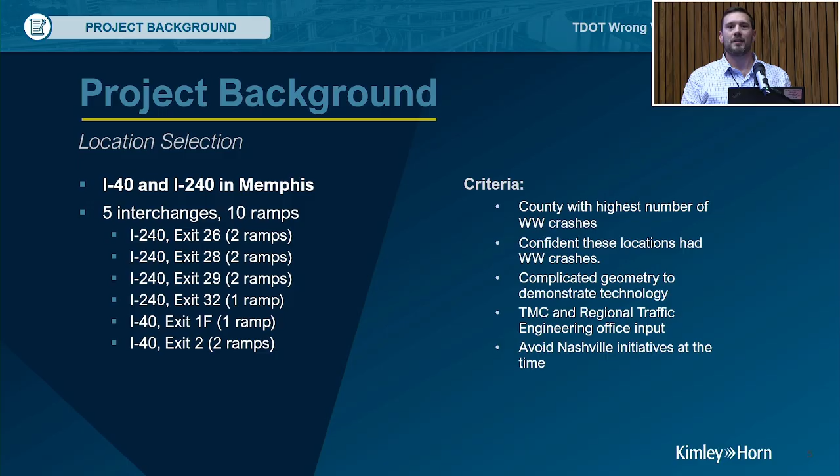They also have a lot of complicated geometry, Doug will get into that in a little bit. So if the system can work here, it can pretty much work anywhere in the state. There's also some feedback from the TMC and the regional traffic engineering offices. Nashville was second on the list, but we wanted to avoid that area because there were other initiatives going on that could impact our analysis of this system. All right, with that I'll go over to Doug to talk about project design.

I'm going to start off by talking through some of these locations Cam mentioned. We had 5 different interchanges with 10 ramps. The one on the top left is Chelsea Avenue. If you're familiar with Memphis, it's the north-south portion of I-40, I-240 that runs in the downtown area just east of the river. So I-40 is on the north, and then I-40 actually cuts west in the middle of our segment over into Arkansas. Then 240, the south portion, actually turns into I-55 going south into Mississippi.

So this is a segment that actually leads into 2 different states, depending on where those vehicles come from or go to. On the north you've got Chelsea Avenue, the next one is Jackson Avenue, then you've got Lamar Avenue, South Parkway, and then one on the south is the Norris Road exit right before 240 hits 55 as it's coming into the Memphis area.

This shows some of the existing ITS infrastructure along the corridor. One of the other reasons why this was a good corridor to choose is there's a good baseline of infrastructure along the corridor, like CCTV cameras and DMS signs, so we could leverage that with our technology to bring in other components that were already out there and reduce the cost of building a fully functional system.

There was one gap. We went out and checked gaps of coverage. One of the goals of one of these systems is to be able to visually confirm that you have a wrong way driver. None of these systems are really 100% accurate, you will have some false calls, whether that's an animal, a maintenance truck backing down the interstate ramp, or a police vehicle. So it's important for our TMC operators to be able to lay eyes on the situation and confirm that it is a wrong way driving situation.

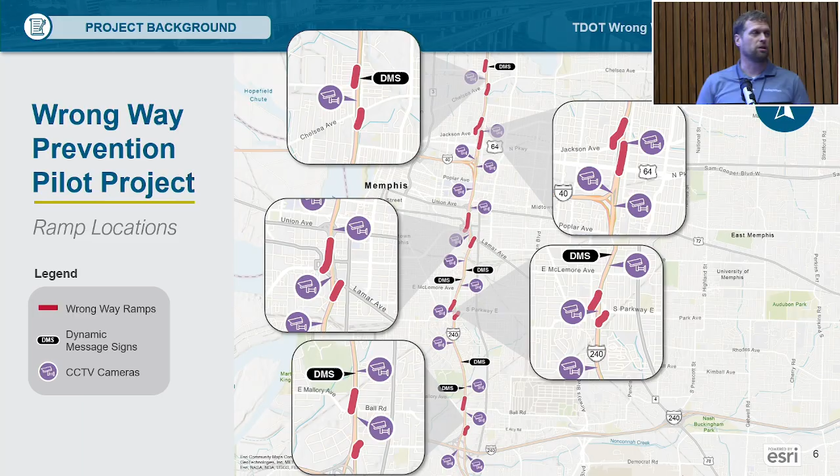So we had one location up at Chelsea Avenue where we didn't have coverage of that northernmost ramp, and so we're installing one more CCTV camera as part of this project as well.

These systems have about an 87% rate of self-correction, based on research done out in Arizona with some of their systems. So you're avoiding a potential head-on collision on a main line that typically results in a fatality. Hopefully it's less than that, but a lot of times these end in fatalities, unfortunately.

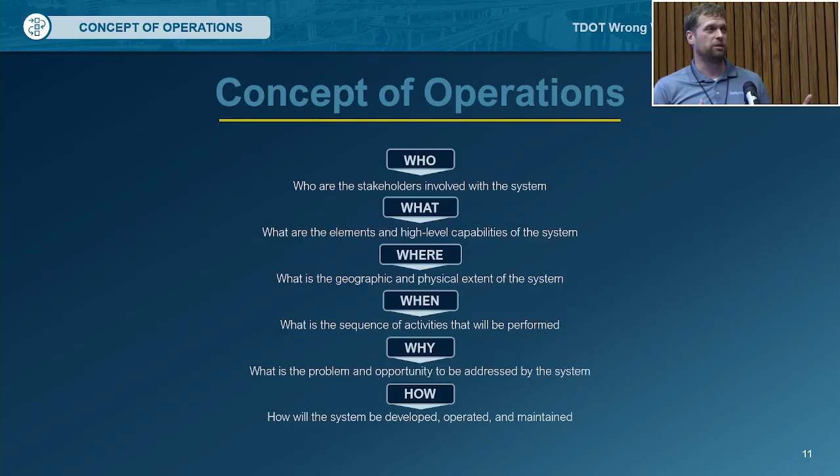If it's a confirmed wrong way driving event, the TMC operator can hit a button and all these automated response plans would happen. But there are some things you want to happen immediately, like the LED flashing signs. The moment a vehicle is detected, you want those coming on because you want to make the driver aware that he's made a mistake. So we went through that sequence of events with them and started developing how we wanted everything to operate.

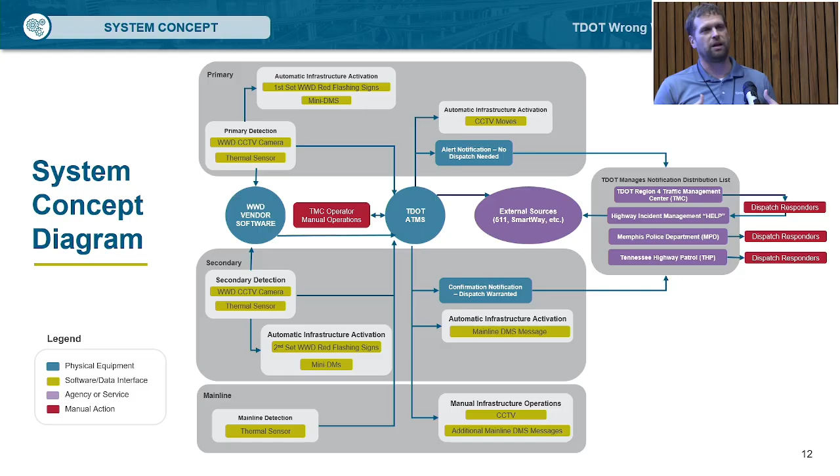We also have some automatic alerts that go out, whether that's to the TMC operators or other people within TDOT, or even at some point Memphis Police or THP, Tennessee Highway Patrol, get alerts as well. The next box, the second gray box, is our secondary zone, with some things identified as automatic and manual type responses, and then the bottom one is the main line. We do have detectors on the ramps, but we also have detectors on the main line, and I'll talk about why we have those in just a minute.

So there's the message that goes out. You want to make the wrong way driver aware with the flashing LED signs, but then what do you put on the sign to tell a right way driver that something's going on ahead? Do you tell them to move left? Do you tell them to move right? Do you tell them to get off the interstate? Ultimately what research has shown is you don't tell them to do anything, because you don't know where that wrong way driver is going to be. Most of the time they move to the right-hand side of the road, which is the left-hand side of the road for the right way driver. So we developed messaging for what those right way drivers are going to see on the DMS sign.

One thing we added is the LED backlit do not enter signs. That's a preventative measure that'll go at the top of the ramp. If you're familiar with TAPCO, they have a Legend Viz sign, which is just a backlit LED do not enter sign. We're adding those to all the tops of the ramps as well, to hopefully deter people from even making the wrong movement onto the ramp before they even reach our system.

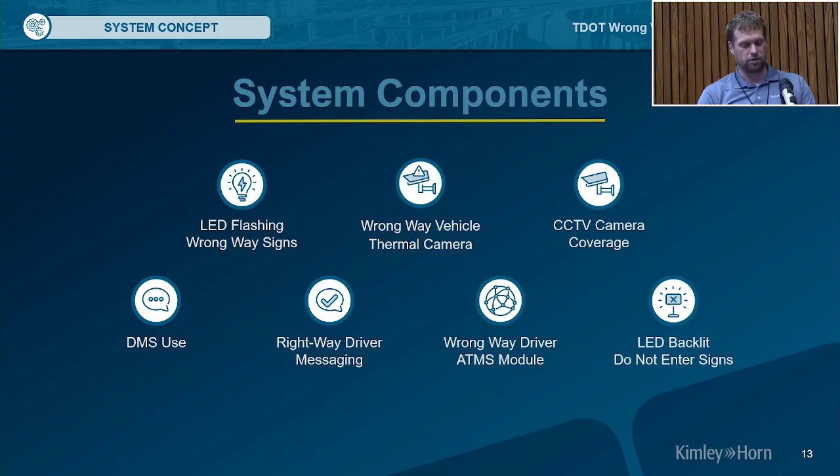Our secondary line is the confirmation zone. We're using it to track and understand what vehicles are not self-correcting. So if they trigger the first one and don't trigger the second one, if the TMC operator didn't get there in time and they self-corrected, they can know they self-corrected because they didn't trigger that second zone. But if they do trigger the second zone, then we know they've moved towards the main line, and now we know we're probably in a wrong way driving situation and we need to respond.

The main line is to track them. We've got 5 different interchanges like I mentioned. So if they get on at the southernmost interchange, we can track them with the main line as they trigger them going down the corridor. However, like I mentioned earlier, we do have different interstates that bisect our corridor coming from Arkansas, I-40. We also have I-55 that's coming up from the south.

And so, like Cam mentioned, it's hard to understand wrong way driving if you don't have detectors or the ability to track these vehicles. You know where the crash happened, but you don't know where they got on going the wrong way. So for us having a pilot corridor, we needed to understand, if there was a crash on our corridor, a head-on crash, did our detector miss it on an upstream ramp, or did they come from off of our pilot corridor? So we've got these positions to be able to track. If they came on our corridor from the south, or came in from Mississippi, or from the west, from Arkansas, we would know that based on those mainline detectors tracking them.

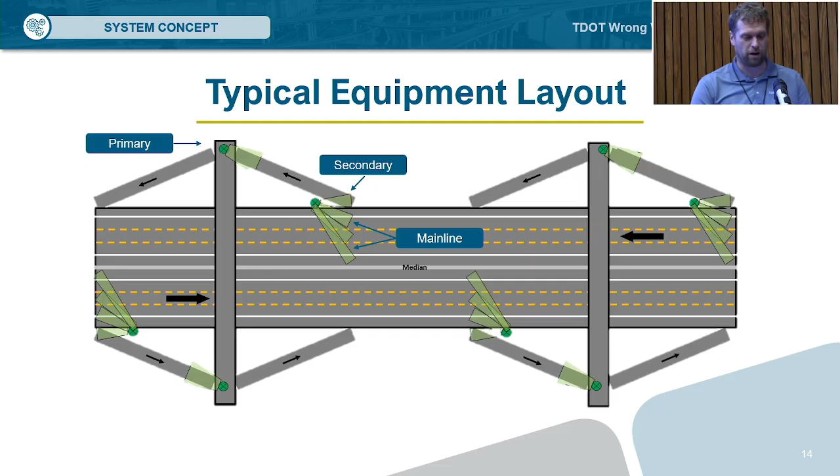We also developed operational scenarios for what's going to happen in each of these cases. There's a lot of decisions that can be made depending on what the driver does. The first one is what happens if the wrong way driver self-corrects at that initial zone. They trigger, they see the lights, they turn around like we saw in that first video. Does the TMC operator care? Do we deploy Memphis Police to go pick them up and see what's going on? Most of the time, these happen at night, with drivers under the influence, or with elderly drivers who maybe didn't take their medication. That's based on a lot of research. You see a lot of those things. So Memphis Police said we may want to stop them anyway, even if they self-correct. They wanted a notification that, hey, we did have a wrong way driver, even though they did self-correct. I don't know that they can get out there quick enough to track them down, but they wanted that information.

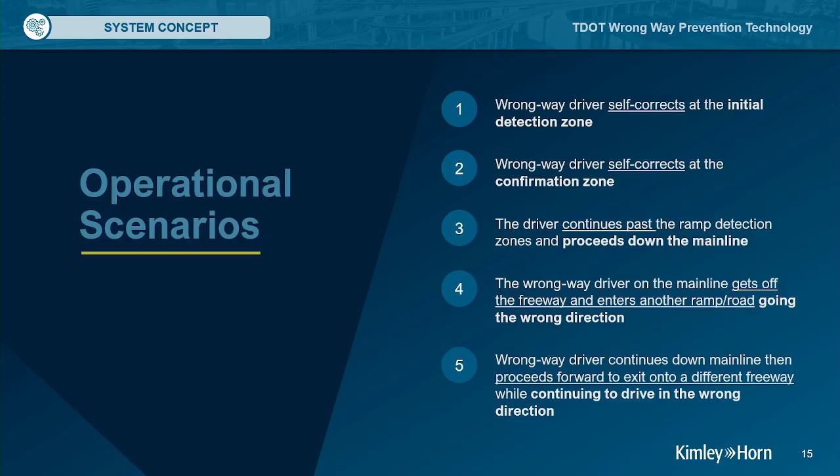Secondly, what happens if they self-correct at the confirmation zone, like you saw in the second video? What if they turn and go in the right direction on the main line? What do we do? We worked through all these scenarios, workshopped them with the whole stakeholder group, and figured out what each group expected to happen and how we could leverage technology to make that easier. All the way down, if we're now in a wrong way driving situation in scenario 3 where they've proceeded and they're on the main line, scenario 4 if they get off on one of those arterial roads, now they're going the wrong way on an arterial road, or what if they leave our corridor and go to another state, or continue on another main interstate. There were a lot of different scenarios we had to flesh out and figure out exactly what was going to happen within the system.

So I'm going to take a few minutes to talk through the geometric challenges that Cam mentioned earlier. The image on the bottom left is the northernmost interstate ramp, Chelsea Avenue. It's a straight, short ramp, so pardon my pun, but it was pretty straightforward for us. Single pole - I'll show you the plan. It was really easy to get all of our detectors on a single pole and figure that ramp out.

The one on the right is South Parkway, a full cloverleaf on the top right, and the bottom right is zoomed in on that top right portion. This is a unique ramp - you have a ramp from the interstate coming in that's actually tying into a one-way local street. You can see it coming in on the right-hand side, and there are driveways to a gas station on this one-way section. So this is one of those confusing geometric situations where you probably have people coming out of that driveway, maybe turning onto that ramp, and now they're going in the wrong direction on the interstate.

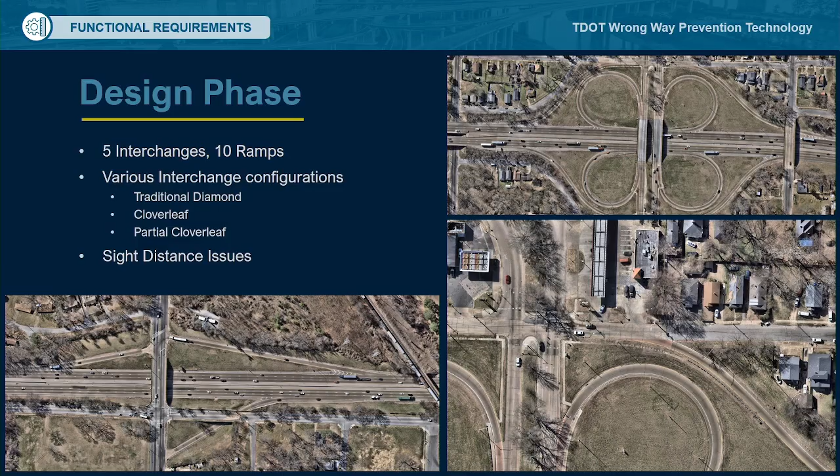These can happen really easily, really quickly when you have confusing geometry like this. But one of the questions was, where do you put your primary detection? We've got it placed after the gore, so we know if they enter the ramp going the wrong direction, because we went out there and watched it. I guarantee you people come out of that driveway and go into that neighborhood the wrong direction all the time. So we don't want this thing triggering every time somebody does that - we had to make sure we put it in a place where we really understood where our wrong-way driving scenario was occurring.

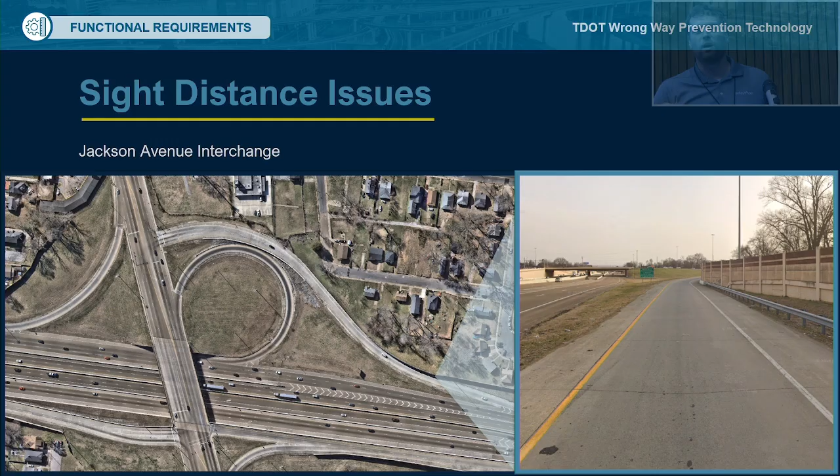This is another one, Jackson Avenue, where we had some sight distance issues. You can see the horizontal curve in the ramp - it actually has a vertical curve as well as you're going up, but that noise wall on the right kind of provided a blind sight line for our right-way drivers. So if there's a vehicle coming the wrong way down that ramp from the arterial, the right-way driver would never know it - they wouldn't see it around that noise wall.

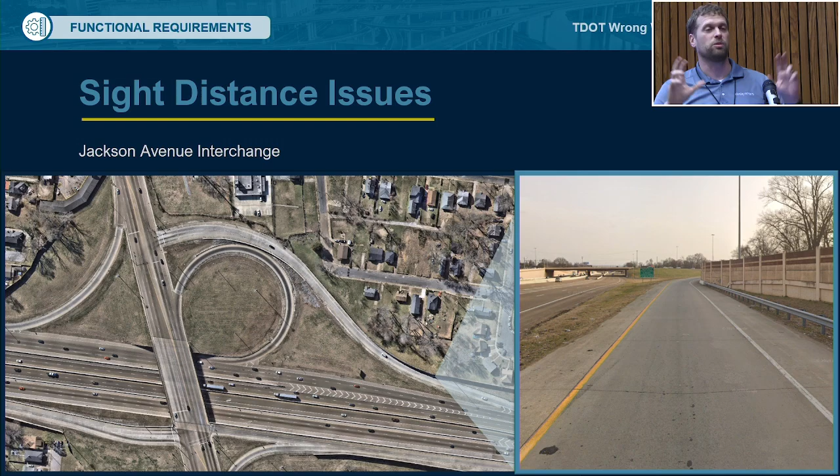So this is a situation where we're implementing what's called an over-the-shoulder DMS sign. It's about a 5x6 sign over that shoulder, kind of right behind that guardrail, and it'll have a message to the right-way driver so that when somebody triggers that primary detection point and the LED flashing lights come on, this sign comes on, giving the right-way driver a message - caution ahead on ramp, or some general message so they know to slow down and be careful.

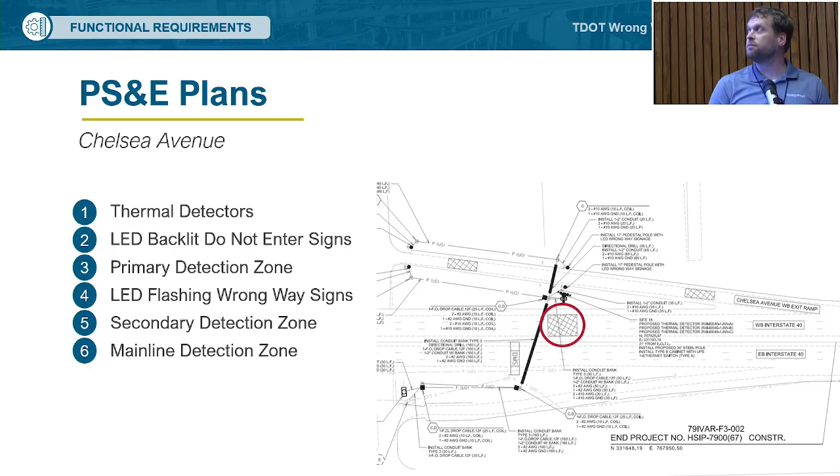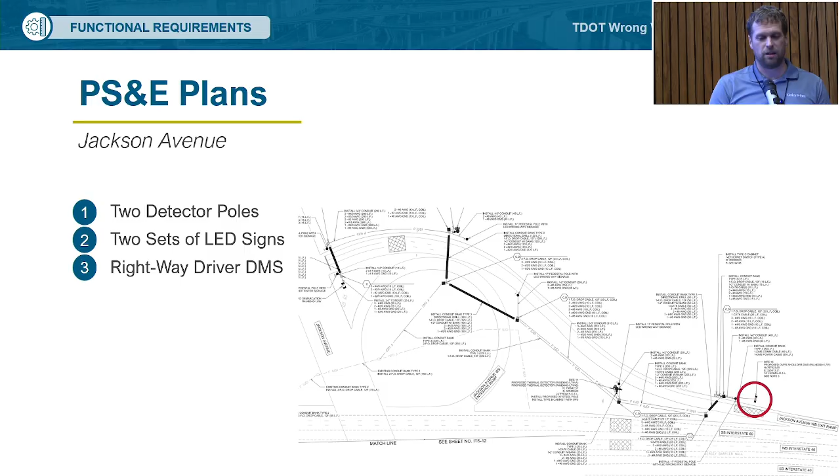This is the Jackson Avenue ramp that I showed you, which had that sight line issue. In this case, we had to separate our detectors into 2 pole locations to get our primary and secondary zones. We do have 2 sets of LED flashing signs that'll both come on with that primary detection, and then we have our over-the-shoulder right-way DMS sign, like I mentioned earlier. So that gives you an idea of the components and layout of what you'll see in this system.

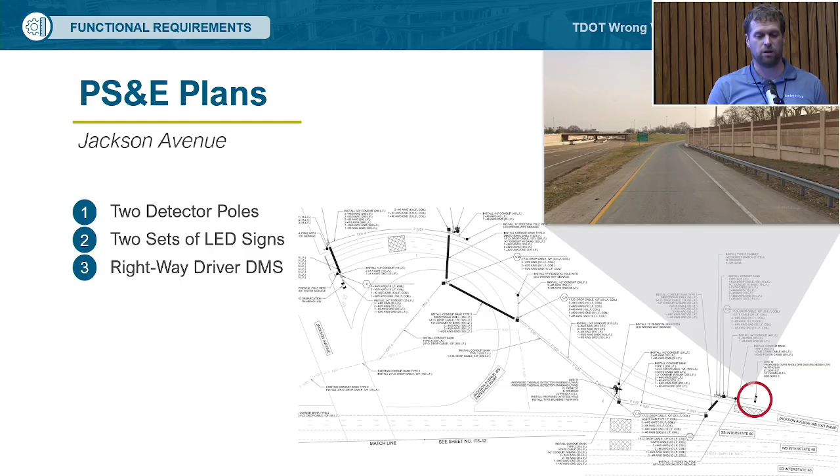Drink this weird canned water for a second.

So, project schedule. Right now we are developing the technical requirements for the software, in partnership with the Southwest Research Institute, or SWRI, the ones that developed the SmartWay Central software that our ITS system uses. The letting date was May 9th of 2025, and it was let for $2.9 million, so roughly about $3 million cost.

Shelby Electric was selected as the contractor for the project, with TAPCO as the wrong-way equipment vendor. This is an interesting relationship because they're doing a project of a very similar scale and scope right across into Arkansas, which I believe helped with the cost of this project. They were able to come in a little underbid from what we expected, which isn't too common these days.

In terms of construction, it started in September of 2025 with some preliminary activities. We're looking to actually test the system in fall of 2026, and hopefully have an operational system by the end of December 2026. So as we get into 2027 and beyond, I'm hoping to utilize some benefits from this system.

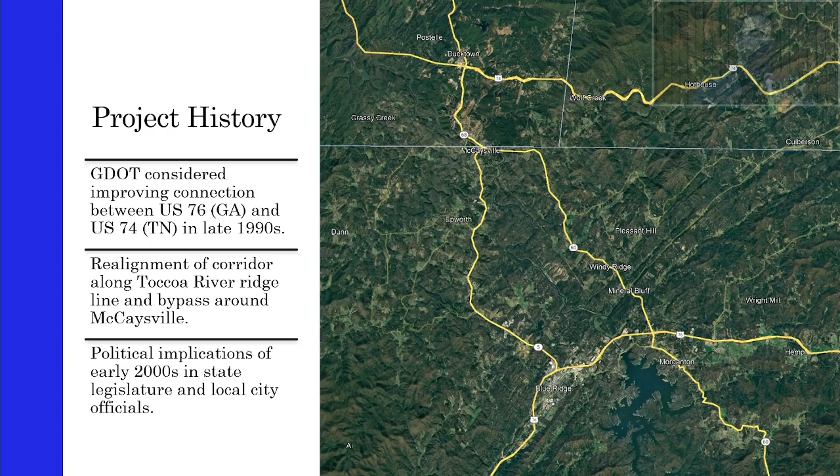This project was moving forward, but because of some political implications, which tends to happen, you had the state legislature as well as the local officials, especially within McCaysville, and through those coordinations it's become what it is today. Ethan's going to talk a little bit about that in his portion later, because what we're going to focus on today is this project from our different perspectives - me as Jacobs from the consultant, and then from the 2 different DOTs that have had to coordinate through this project.

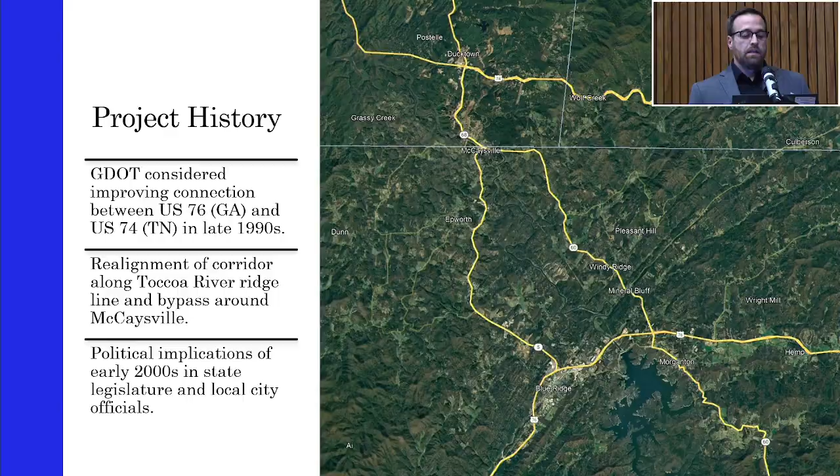Zooming in a little bit more on our project history, you have to go back to 2015. That's when the combined project, which you see the 3 phases up there, began with the first concept report in 2016. Through that coordination, through those changes, we had another concept report in 2018. Then 3 years later, GDOT decided to have a revised concept report where we split the project from one large widening down to the 3 phases, looking at cost and schedule to see what they could move forward and build while the other 2 are coming behind it.

So in this case we have the 3 pieces. You'll see in blue here the SR5 North Georgia Sidewalks project. This goes along SR5 North. It's fully within Georgia, all the way through downtown McCaysville. It's a widening and operation improvement project. You can see at the very end where McCaysville and Copperhill meet at the Tennessee state line, it's a T intersection - it's really difficult for trucks to get through that area. It's very tight, with a lot of downtown structures and downtown parking.

So that's where the other piece comes in, the bypass. It's a new location road that's 2 phases. You'll see in green there, we call it the SR5 connector to Georgia bypass. That's fully on the Georgia side. It comes off a roundabout from the Georgia sidewalks and goes all the way to the state line. From there you have the 3rd phase, which we're going to start highlighting starting next slide. This one starts at the state line, called the SR68 connector, because on the Tennessee side you're connected into SR68 instead. This one comes down, bridges over the river, comes around the hill - you can see the loop there - and then ties into a roundabout at SR68.

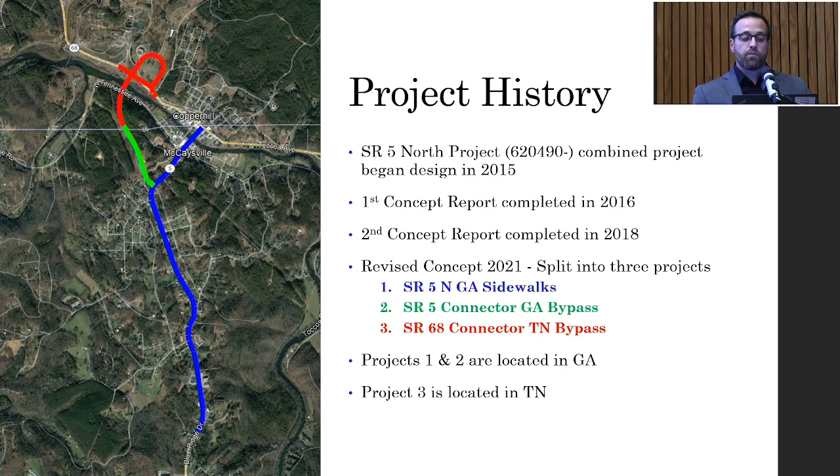As I already noted, the first 2 phases, the blue and green, those are fully within Georgia. The 3rd phase is in Tennessee.

Hold on, I think I skipped it. Yeah, there we go. So zooming in on the project.

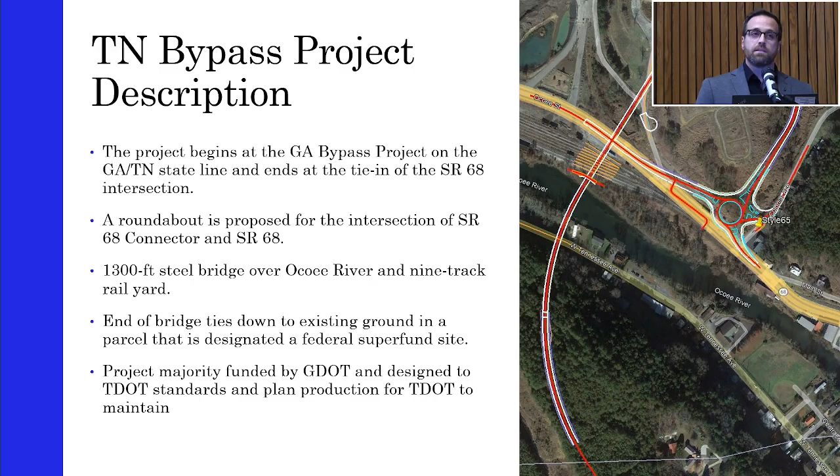So this is just the Tennessee portion. This is phase 3. This is under design currently, moving towards plan in hand plans next year. This project begins at the Georgia bypass at the state line, comes down, ties into SR68 at the roundabout, which you can see there. This project has a 1,300-foot steel bridge that'll go over 2 roadways, a fairly large river, a 9-track rail yard, as well as Baltic Ave that comes up to the administrative offices on that parcel. Another fun part of this one is the end of the bridge where it ties down over there and loops around that hill - that existing parcel is a federally designated Superfund site, so that also added some extra coordination into the project.

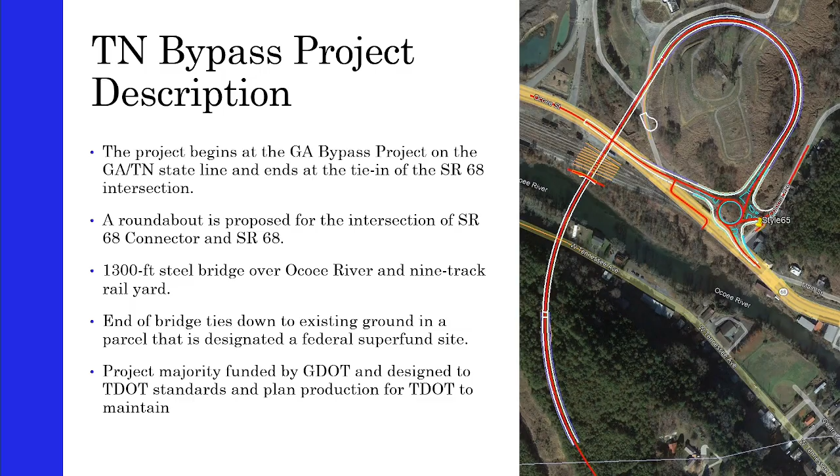Did want to note this part, we'll talk about it a little bit more later too - the project is majority funded by GDOT, but it's going to be designed to TDOT standards and plan production, as well as it will be for TDOT to maintain afterwards.

Some of the project challenges - if you haven't seen any already, or hopefully you've seen what we've already been dealing with - there's some other ones that we also had to work through and really coordinate between the states. On the environmental side of things, you have the permitting, you had to work with the GDOT process and figure out what that TDOT permitting was going to look like. What kind of challenges are we going to be sitting with? We have a Superfund site, so what are the challenges that come from that? What type of mitigation, or what do you have to haul away if you're going to impact any of that site? And railroad coordination - we're crossing a 9-track rail system.

It's not that busy of a line, but it's still owned by the railroad, and the existing roadway of SR68 falls within their property. So you already have easement, but we're going to need future easement as well for that.

And for what I was already talking about, you have two state processes that we're trying to merge together. GDOT's paying for this project, so we have to work through their procurement process, but we're trying to make sure we're setting the schedule and requirements that follow TDOT.

So we're trying to figure out and bridge those gaps. The main thing really comes down to trying to figure out what that schedule is going to look like. We can talk in similar words and be saying different things, or be saying different things but talking about the same thing. So we're trying to figure out where those connections are, and really figure out the cost and schedule of this project, and how we get to the end goal.

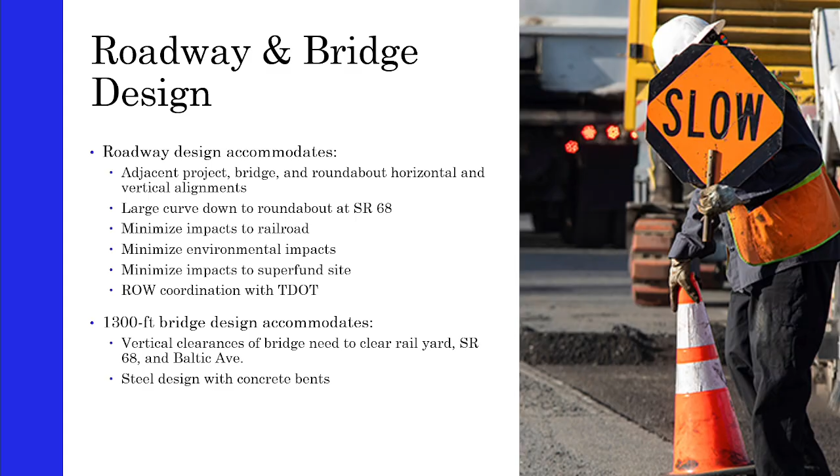We had to really coordinate with all those different disciplines within TDOT and GDOT to try to figure out what it's going to take to buy that right-of-way, and how long that process is going to take. Surprise—it takes a while.

For the bridge, like I said, you have a 1,300-foot-long bridge with all those vertical clearances. You have to get over the railroad, and you have to work around the river, which is a recreational river through there. So you have folks fishing, kayaking, swimming, tubing, all within this river that you have to work around. This bridge is a steel bridge with concrete bents too.

In the next part, we kind of talk about constructability. That played a big portion of our design.

With the TDOT process, this does require a constructability meeting, and this was back in 2023 after we did our right-of-way plans at that time. I hadn't been part of the TDOT process before, but it's a very robust process, and I think it works really well. I'll talk a little bit about that too.

For those in the GDOT hemisphere who don't know, they invited the TDOT folks, our GDOT folks, as well as the consultant working on it, Jacobs. Then they invite and share the plans as they currently are with four different contractors, and from there they set up meetings with those contractors, allowing them to look at it and then present their concerns and suggestions.

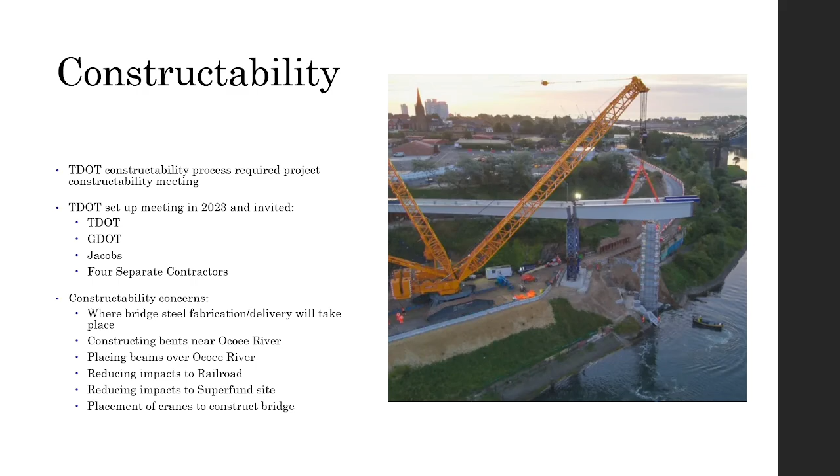Our bents are not in the river, but they're next to it. So do they need jetties to construct this? Where would they want to place their crane systems? The crane pads, how big are the cranes? Those are all questions that we were working through with them.

Some contractors needed larger cranes because they wanted to do with less, others wanted smaller cranes, and that all changed how much of that easement we were going to need. Their goal was always to reduce their impacts to those parcels from the construction side if they could. So through those conversations, we were able to help set that footprint for the project, and that way later on, the goal is that they have what they need. They don't need to go back to TDOT, or have to use more expensive methods to construct this, because we didn't give them enough space.

The next area that is not surprising is the environmental coordination. This has been a very big part, and we're still working through some of these items. The first item you have is that Superfund site, which is an old copper mine. So your first thought's probably, of course, that's a Superfund site, there's all those chemicals from the copper mine, but that's not really what was designated as a Superfund site. It was the acid-producing rock that was underground.

This rock is, once water infiltrates the ground or rain comes, if you expose that rock and rain hits it, there's a material in there that will dissolve slowly over time and decrease the pH of the water, making it acidic, which then kills the vegetation and the animals within the water. It goes into the streams, which are right next to the Ocoee River, and therefore flows into that.

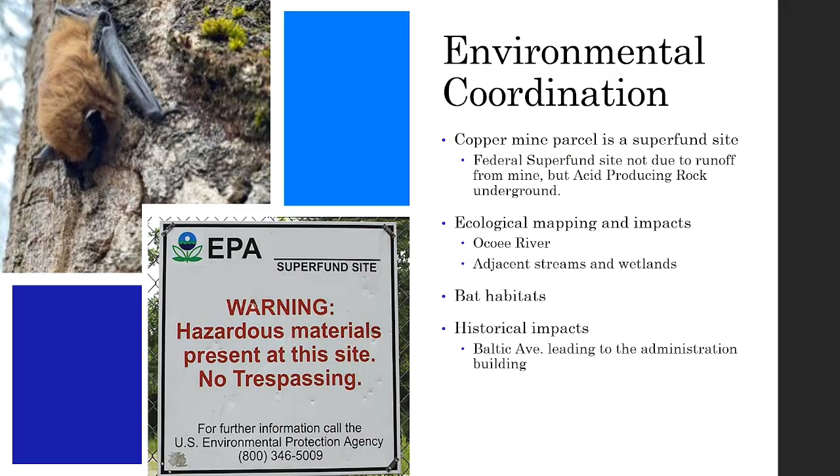The next discipline I'm going to talk about, and this is the last one for myself to talk about, is the geotechnical coordination. So we have the ESA phase 1 and 2. You have bridge foundations, culvert foundations, wall foundations, as well as that geotechnical report that tells you about the soils, about the acid producing material that's out there. All this required a lot of drilling and it took a very long time because it's out in a very rural area and it is hilly. So you can't have a lot of different drill rigs out there, if you can even find that many to get out there. So it's a huge undertaking that our geotech sub-consultant had to get done.

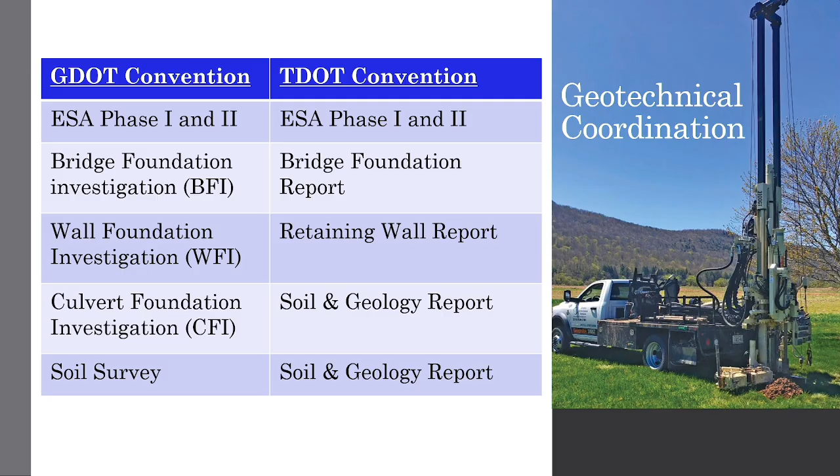And you run into these communication barriers sometimes where, as engineers, we love our acronyms, and your acronym doesn't necessarily line up with the other state. You're talking about the same report, but for example, you have GDOT's Bridge Foundation Investigation. Okay, that's pretty easy to figure out, but if I'm just saying BFI over and over, everyone's going to look at me like I'm crazy. So you have to figure out that naming convention and work through these different ones.

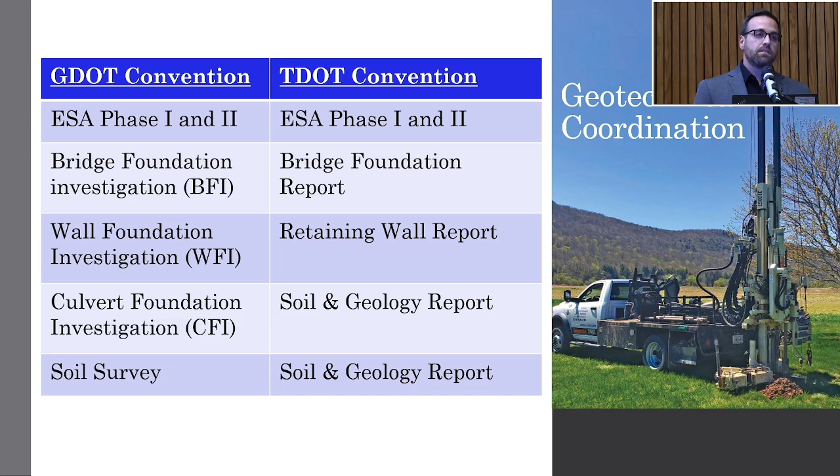Another example is with more on the environmental side. GDOT has what they call AOEs, but TDOT calls them technical studies. So working through that, and really bridging those communication barriers, has been important. And then once you do that, you have to figure out, okay, we're used to this GDOT way of doing things, but that's not necessarily what TDOT does. So if someone from one place is reviewing it for someone else, the information that's stored in there and the way it's presented is going to be different. So if there's really one theme you get from our presentation today, it's communication, right?

We have to make sure we understand what we're talking about and make sure others understand too, because in the end we're working through our schedule trying to get to the same goal. We're all in this together, so it's really just trying to work through that as a team.

That brings me to my final part before I hand it over to Ethan here, talking about that bi-state coordination and working through that. Like I said, GDOT's the lead agency, they're the project sponsor, they're paying for the majority of the project, but TDOT will be letting the project and they'll be responsible for maintaining it when it's complete. So how do we work through that? I'm going to let them talk through that.

The project's going to follow TDOT standards and guidelines, but the schedule is being set by GDOT. So you have to work within TDOT to align those processes. How do we do that? How long does it take for things to be reviewed? How long is it going to take to complete this stuff? How does the review process differ? Through this project, we also had TDOT updated to the Project Delivery Network, the PDN network, so we had to play with that shift as well as we worked through it. So from there, I'm going to hand it over to Ethan and let him give you guys his perspective from the GDOT side of things.

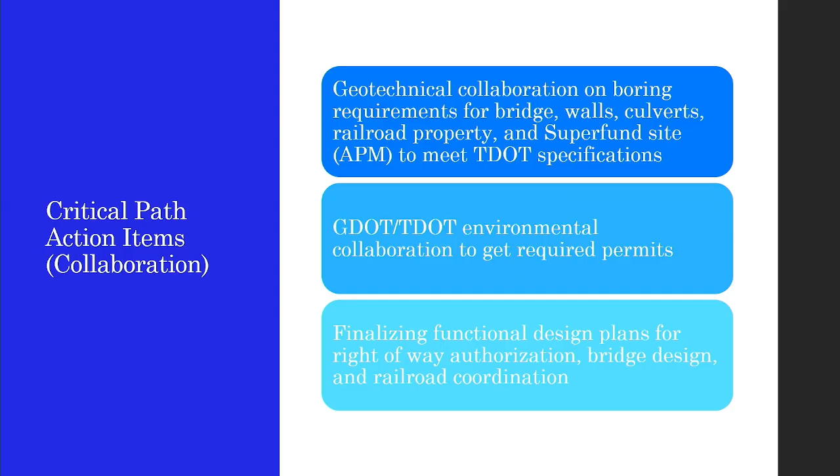The environmental process is also another critical path item. We have to get permits and things like that ready. Also in this area, there's mitigation and purchasing credits and how all that stuff works.

So we're collaborating between the 2 agencies, and GDOT is preparing the permits and applications for the Army Corps, TDEC, and TVA. And then TDOT's role is to review the applications and assist with the templates to expedite this process. So they're preparing everything, and then TDOT is reviewing to make sure that it's how they would put one together to send to these agencies.

And then finally, we're in the process of getting our functional design plans. Those have been approved, and we're going to be moving into the right-of-way phase. So there's a lot of processes to get that. Getting the functional plans approval is one of those. We just recently got that.

So that way we can get right-of-way authorized, and then the railroad coordination and bridge design's underway now, but the coordination with the railroad's another critical path item. So hopefully we can get those 3 knocked out and keep this project moving forward.

TDOT's project team is reviewing everything to ensure the project meets our specifications, but at the same time providing critical guidance to ensure these items are done correctly for the overall success of the project. So collaboration and assisting is at the centerpiece of this project, and we want to be a great partner. We want a great, successful project, one we maintain. So there's a vested interest in that, being in the state of Tennessee as well.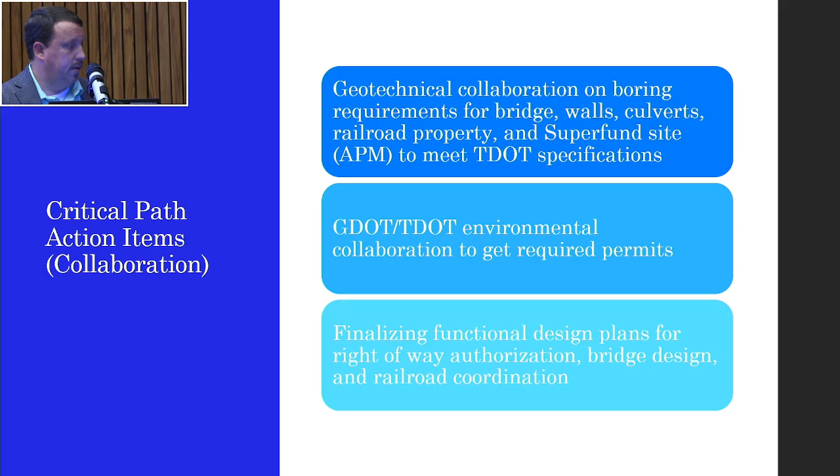So in conclusion, as we consider these challenges, missteps, and advances made to progress this project, the commitment shown by both states' transportation departments and their multiple generations of project team members is consistently remarkable, in my opinion. As transportation agencies across our country change and new generations take on roles of service and leadership, what role will they truly serve?

Will these agencies adapt to the needs of our citizens, businesses, and communities, or will they make recurring excuses? Will they deliver projects that build our states, or will they find reasons that project delivery is just too difficult?

Further, we should ask ourselves, are we content with good enough? We should ask ourselves if we respect the work that we do, or if we think it's an unchanging industry that's too old to learn new tricks.

This project is a prime example of partnered leadership between historic organizations that are driven by the needs of a local community and have shown consistent commitment across generations of this project team to face first of its kind challenges and accept that difficulty in order to deliver a project that has been desired for generations.